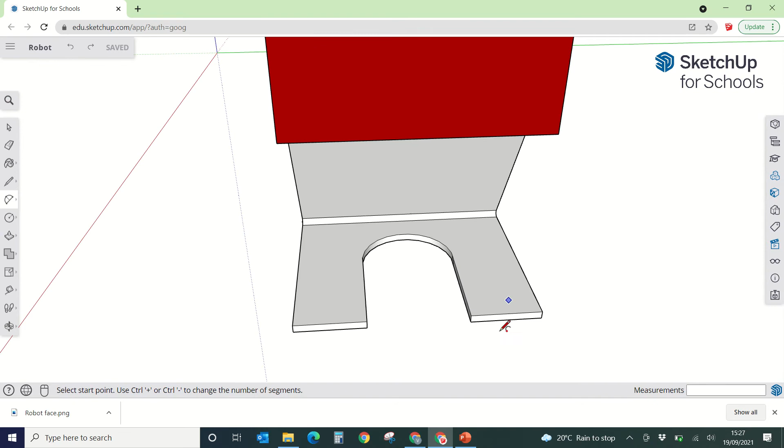Okay, so all that's left to do with our feet here is obviously to round the ends to make them look a bit more like feet, because at the moment it's quite angular and doesn't look that great.

So what we're going to do is firstly use the ruler tool to give us a line that we're going to set our curves to. We're going to go over to the left and click on tape measure, this icon at the top here, the tape measure tool. And then we're just going to click on the ends of the foot on the top.

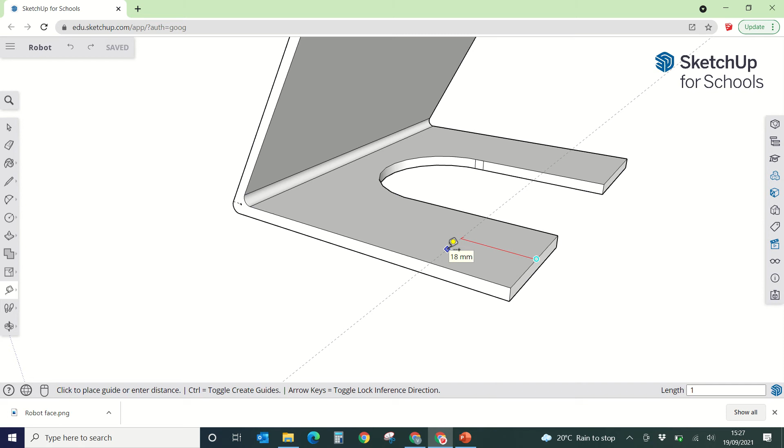So on the top line here, click, and then we're going to move in by 15 millimeters. Just as always, click, release, and then move so it's all elastic. And then we're going to type 1, 5, and press enter. That just gives us a guideline so that we can use that with our arcs to make sure it's equal on both sides.

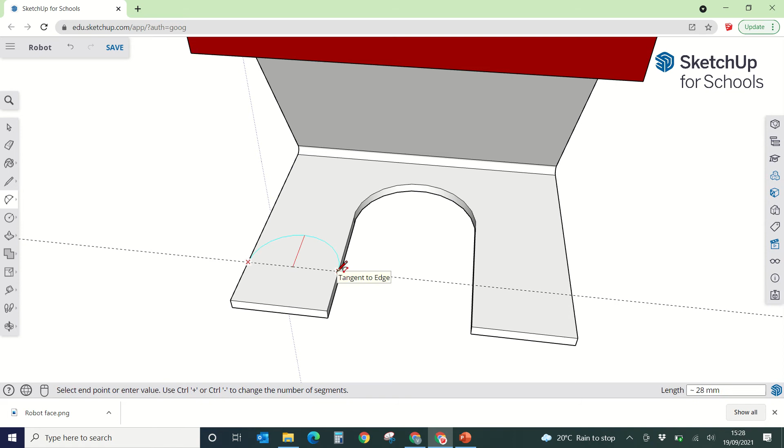So we're going to head over left to the arc tool, the 2-point arc tool, which looks like this. Select that, and then very easily we're just going to click here, click, release, move over to here, click, release, and then just move to that center point there till it goes blue, click. Same over here, click, release, move across, click, release, move to the front, click, release, and then we've got our 2 curves for our feet.

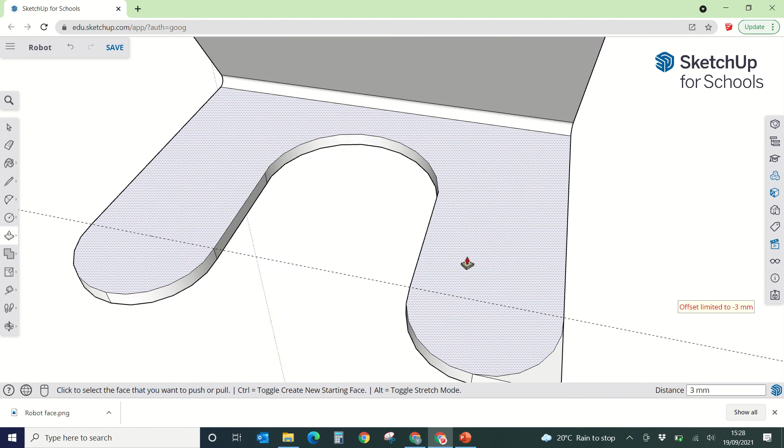All that's left to do is go back to our trusty push-pull tool, click on that, and then we're just going to drag and remove those bits of acrylic that we don't need anymore. As always, you can obviously just drag it down and release it when it gets to the bottom, or click, pull it, and then go to the bottom, and then just click anywhere on the base, and it will just remove that for you. So now we are looking really good.

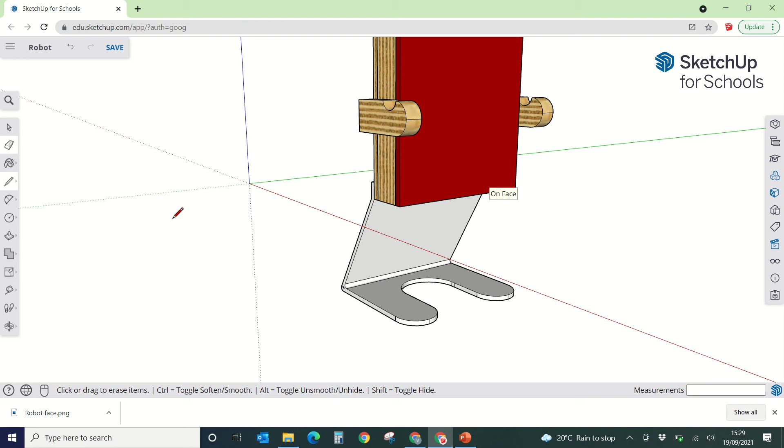We've pretty much made all the parts of our robot now, and all that's left to do is to make this acrylic part a component. So I'm just going to quickly delete that dotted line because I don't need that guide anymore.

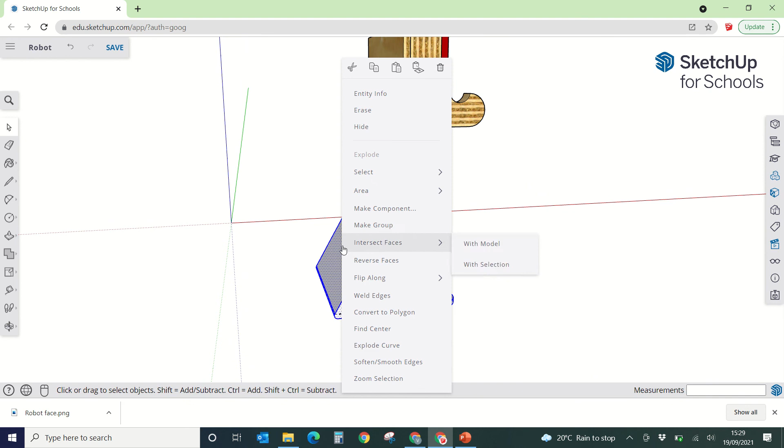And then we're going to make these feet a component. Now it can be quite tricky to select all of it without selecting other pieces. So a little cheat is that with the left mouse click you can click 3 times very quickly. Click, click, click. And you will see it has selected all the parts that it thinks that I want to make a component, which is right. And then that just leaves me to right click, make component, base or stand, doesn't really matter, and click OK.

And now that piece of acrylic is now a component. Don't forget to save. Saving, saved. Perfect.